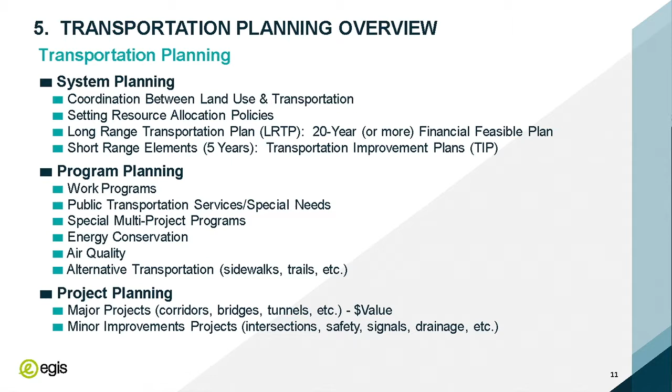And then there's project planning, and that's generally broken down into two pieces. You either have major projects or minor projects, and minor improvements are things like intersection improvements, safety activities, traffic signals, the striping of highways, and very often those are maintenance kind of projects that are wrapped into a minor improvement project. Typically, these are done on toll roads, but they are not the focus of transportation planning.

It's the major projects, the development of new transportation corridors, the widening of major highways, and certainly the design, development, and building of new toll roads that fall in that major project category. And that's really what we're going to focus on in today's discussion. So it's the system, program, and project planning for major projects that we're going to look at.

And you mentioned the MPO. Sometimes it's referred to as an MTPO, the Metropolitan Transportation Planning Organization. Sometimes it's vested in an organization called a Council of Government, a COG. But whatever the terminology, there's usually an overarching organization that brings in multiple municipalities and jurisdictions into the transportation planning process. And the result or the product of long-range planning is called an LRTP, a long-range transportation plan. And generally that is a long-range plan and a system forecast that goes out a minimum of 20 years.

Now, some agencies have started to look beyond 20 years because it sometimes takes somewhere between 10 and 15 years from the beginning of planning all the way through construction of a major project. We found that the 20-year horizon may not necessarily be the best to use for a major project. Toll roads tend to go a little faster because toll road planning tends to come off of an existing planning process. So when toll roads get involved, it's usually after this long-range transportation planning process has begun. So we're starting to see MPOs look out 30 years and even 40 years sometimes in looking forward to determine what the needs are within a large urban area.

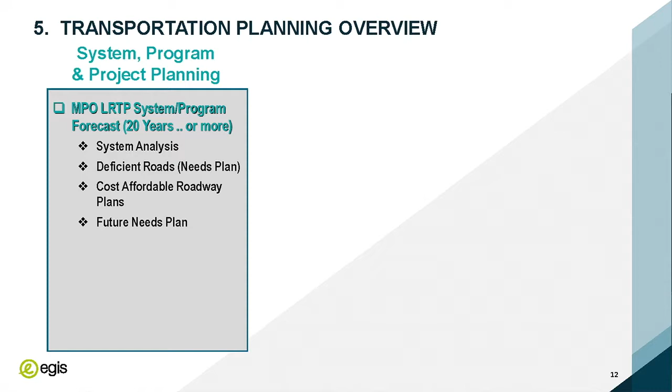And essentially they use a large computer model based on a graphic that looks a whole lot like the GPS program in your car, right? And in fact, the models that we use in transportation were the forerunners of what you have in your car and what you use on Waze these days. These computer models are what we've been using in transportation for the last 35 to 40 years to do our long-range transportation planning. So the first activity is to look at a needs plan.

And you do that by doing traffic counts out on roads. You probably have run over lots of tubes that you've seen out in the roadway. Today we've gotten a little more sophisticated. Most of our major roads have loops embedded in the road that give us accurate traffic counts 24/7 on roadways. So we know how much traffic is on these roads, and we know, based on the design of the road, how much traffic that road should be able to carry. And based on that, we can identify which roads are failing.

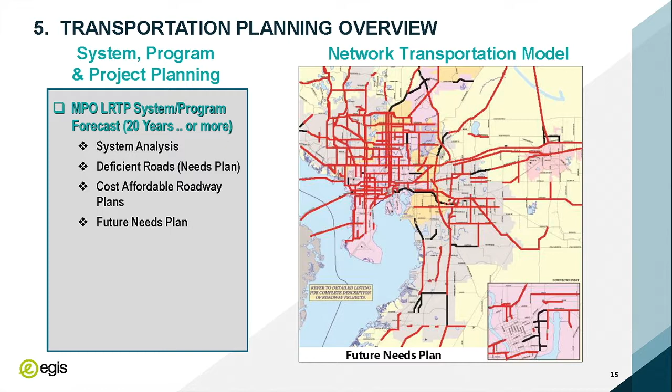And you can see this particular community didn't do so well. So this says to a transportation planner, maybe we need to find some other solutions. Maybe we need to start looking at not just the gas tax and our local revenues to fix those transportation problems. Maybe we ought to look at tolling and some other financial tools in the toolbox, because this as a future is really not acceptable. And that's the basic long-range transportation process. This is what it tends to look like.

The models that we develop are network models. They break a community down into zones. We call them traffic analysis zones. And within each one of those zones, we can identify the population. That's both the amount of the population and the density of the population. And the reason population is important is that most of these areas are where we live, and we call them productions, because our basic trip in the morning and in the afternoon during rush hour, what we call peak hours, is really a journey to work. The journey to work drives most of the congestion that we have in the US.

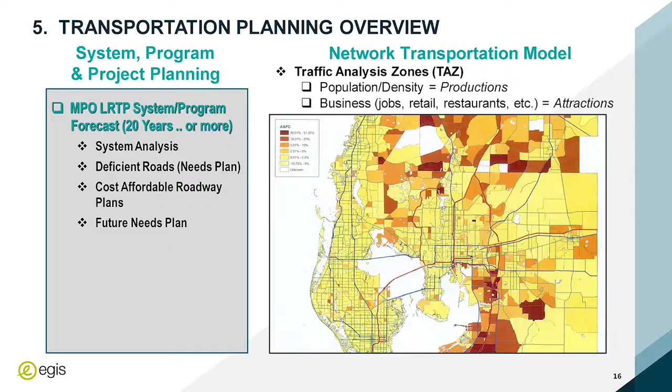And to identify that journey to work, we need to understand where people are coming from and where they're driving to, and that's productions and attractions. Now, attractions are more than just where you work. It's also where you shop, where you go out to eat, and where you go for entertainment. Those are also things that attract trips. So if we have a pretty good understanding of where our productions and attractions are, we can begin to create a mathematical model that identifies what the network looks like and how it works.

Then, how do we do this? As you can see, the model, if we zoomed in on one of these areas, is broken up into what we call links and nodes. The links represent the various pieces of the highway network, and the nodes are either the major intersections or they are actually the major attractions. So a large mall might be a node, a business park might be a node. The central business district is one large node in many cities. And being able to then mathematically move the productions and attractions, the trips that are generated daily, onto this network of links and nodes allows us to create essentially a mathematical model of what's going on.

We then have to code that model. We have to put in other variables that affect our trips. And part of that is the size of the roadway, the design of the roadway. So while that model looks like a link is just a line on a map, when we put the mathematics into the model, we have to actually put in how many lanes of traffic are on that link and what the design is. Is it a limited access highway, which will carry more traffic, or is it a general service highway, which will carry much less traffic?

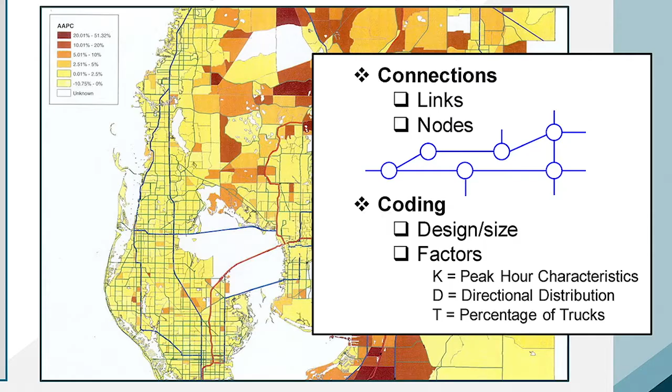And then the T factor is also very important because trucks, and that's what the T factor stands for, the percentage of trucks on the roadway. The percentage of trucks is critical because a truck, especially, and we're talking about large trucks, they take up a much larger piece of the roadway than automobiles. A car will take up a certain amount of capacity of the road. A truck, because of its size and its lack of mobility related to a car, takes up about 2.5 times the amount of capacity of the roadway. So if you have a high percentage of trucks in your travel stream, that road will actually carry less traffic.

So I'll give you a perfect example. We have interstate highway percentages during the daytime that sometimes in urban areas run as high as 30% trucks. If you have a toll road and you only have 2 or 3% trucks using the toll road, you have much more capacity to sell, and you can impact congestion much more with that lower amount of trucks. So having a T factor tells you what the demand is in that particular area, certainly in a corridor, and how you might address it with a solution.

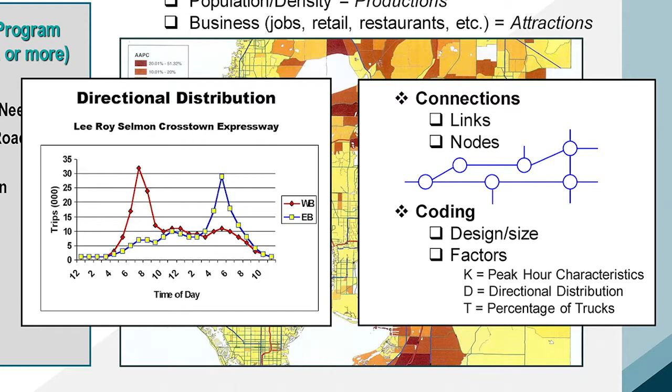If you look at an interstate's pattern, you'll see that those peaks are probably a little bit lower, and that there's a much bigger bump in the middle of the day around lunch hour. And some interstates, that peak goes up and stays there all day long. So it's just one of the kind of charts that we use as transportation planners to better understand what's going on.

So then, okay, we have this wonderful mathematical model. We've put in all these variables. How do we actually get this model to tell us something that's worthwhile? That's what we call a calibration and validation process. Because we have such good information about the current amount of traffic on the roadways, we can build a model, we can load all of these variables into the model, and then we can run the model for the current population and employment.

And when we do that, we can then validate that model. We can look at the output of the model and compare it to what we know is an actual fact. Here's the traffic today. We've built this model. We've loaded our population and employment. We've loaded all of the variables, the K, T, and D factors. And now we run the model and we compare it to the existing traffic conditions. And if we're within 1 or 2 percentage points in either direction, we know that we have really built a very successful model. If we are outside of those parameters, then we have to go back in and calibrate the model and rerun it until we can validate the accuracy of the model.

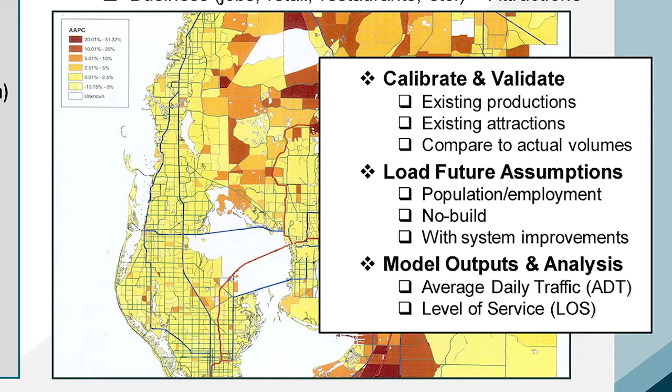We'll put in the future system improvements, and then we're going to rerun the model for 20 years down the road, and that output is going to give us what the average daily traffic demand is on all of these links, what the level of service is going to be on these links, and where we really need to spend our future dollars. So that's how the long-range transportation planning process works.

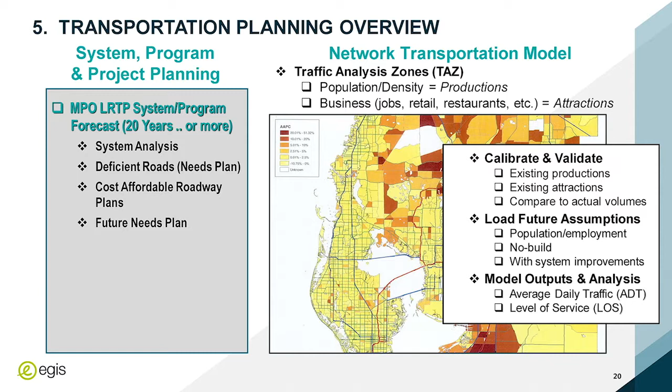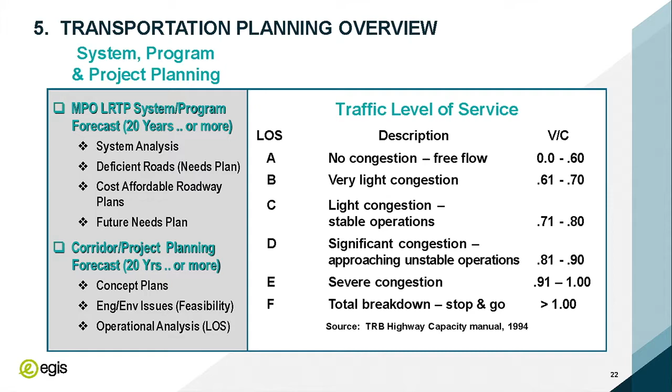What we're looking for are serious problems. We call them showstoppers. Is there anything out there that we really need to be aware of that would cause us a problem? And maybe this means we don't look at this corridor for our solution. Maybe we find a solution somewhere else for this problem. So maybe we go around this area as opposed to going through it with our improvement. And then, of course, we continue to use the model, the long-range model, but we only use it within a small area.

We're starting to look at a project and the operational analysis. This takes us to really toll planning feasibility. Right. And that's a financial process, right, Tom? Yeah, and then we've identified the corridor at this point. Now we're looking for how we're going to pay for those improvements to that corridor, right? So part of the toll planning process begins here once we know we have a good corridor.

So we look at those, as Marty talked about, we've looked at the project justification, we've looked at all the background details. Now we come in and say, well, are there any other locations available for this corridor that could lower the cost, reduce environmental impact, reduce public issues? We look at those different corridors, as Marty mentioned, to try to find the best, most feasible one.

And then we look at, is this really a good transportation project? Because if it's not a solid transportation project, as Marty mentioned earlier, it's not going to be a toll project. It has to be a really solid transportation need. And usually some of the worst or most difficult projects to build, elevate, and have higher costs, and therefore they ultimately become toll facility projects because it takes too long to accumulate the gas tax money to make that project really viable. And you want to address those as quickly as you can, those really critical projects.

And so the Council on Environmental Quality was the forebearer of a lot of the modern day environmental processes that these projects have to go through, which includes the NEPA, which is the National Environmental Policy Act, which really tells us how we have to address environmental concerns as we plan these projects. You know, back in the late 70s, when I started my transportation planning career, we were doing environmental impact statements under NEPA at that time. An environmental impact statement looked like about the size of a comic book. It was a pretty thin document.

I was really at the forefront of implementing the NEPA process. Today, environmental studies are extremely involved. They go into all kinds of very specific activities. Nixon's, one of his first executive orders was the protection of wetlands.

And I know we don't think of him in this regard, but he is one of the first presidents who had an environmental conscience. When you look at NEPA and the federal environmental study process, what you see today also is that most states have adopted an environmental impact process that looks very similar. In fact, the only differences sometimes between the federal process and a state environmental impact process is who reviews the documents.

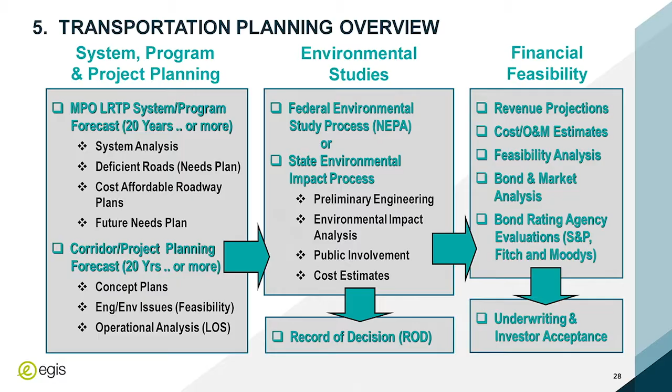This is a process that has got to convince a wide range of people that this project is feasible and that the bonds can be repaid. And of course, where we get to at the very end is that we want acceptance by Wall Street, acceptance by the underwriters who will carry this project out to the bond market. And because these are tax-free bonds, and because the toll industry has such an incredibly good reputation for paying these bonds, typically they sell out in a day or two.

So today we've had an opportunity to take a look at all of the components of transportation planning and how the toll industry fits in to the transportation planning process. I know this has been a little more of an academic discussion of that process, maybe a little bit deeper dive than what we've been doing on some of our other Toll 101 segments, but I hope everyone has gotten some value out of it.